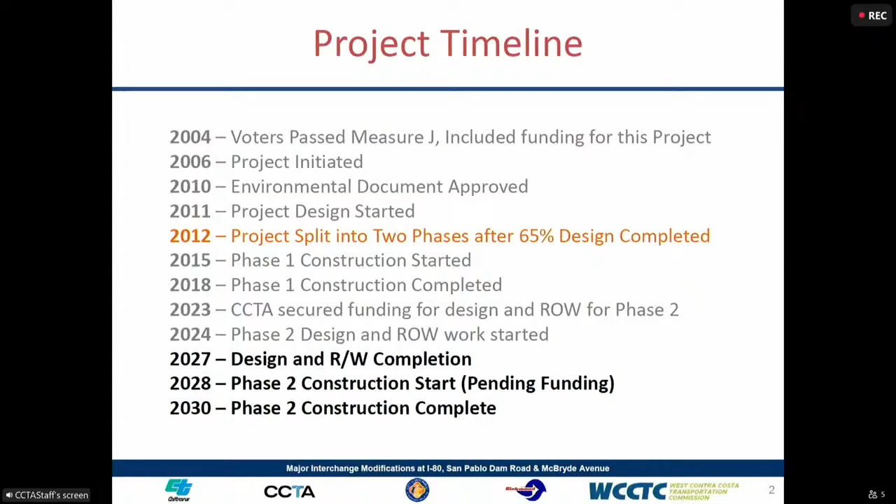So I mentioned we split the project into 2 phases. This might be too small to see, but the green portion is what we completed in 2018. We managed to address the issue of how close it is to the El Portal Drive on-ramp, so we closed that on-ramp and moved it north to make room for weaving on the freeway.

Also, we replaced the pedestrian bridge that leads to Riverside Elementary School, which was a big deal. When we replaced it, we extended it across Amador Street, so kids don't have to cross a busy street once they cross the freeway. It'll take them directly to the school property. That was a big safety improvement done as part of Phase 1.

Everything else needs to be done as part of Phase 2. Phase 1 cost us about $42 million. Phase 2, which will replace the interchange, is a much more expensive project, and we'll go over the costs later.

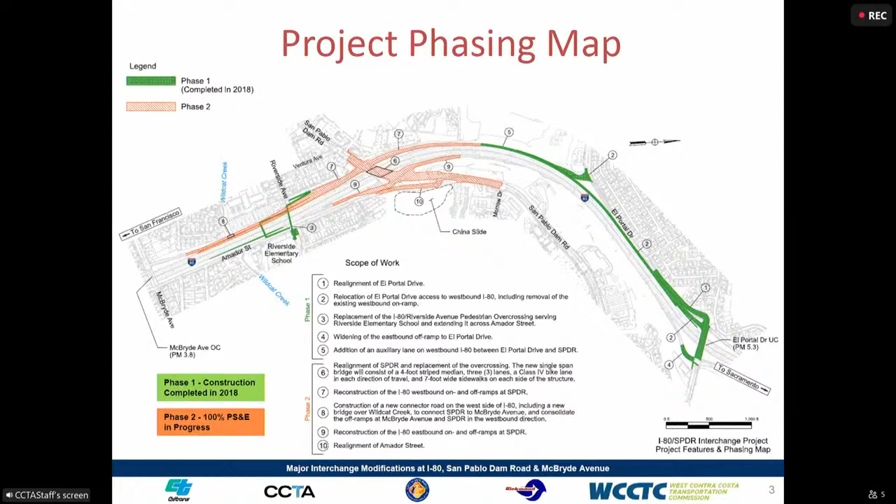In terms of the needs of the project, I feel like I'm preaching to the choir here. The congestion is one issue—you can see the ambulance stuck in traffic on San Pablo Dam Road. That's not an ideal situation.

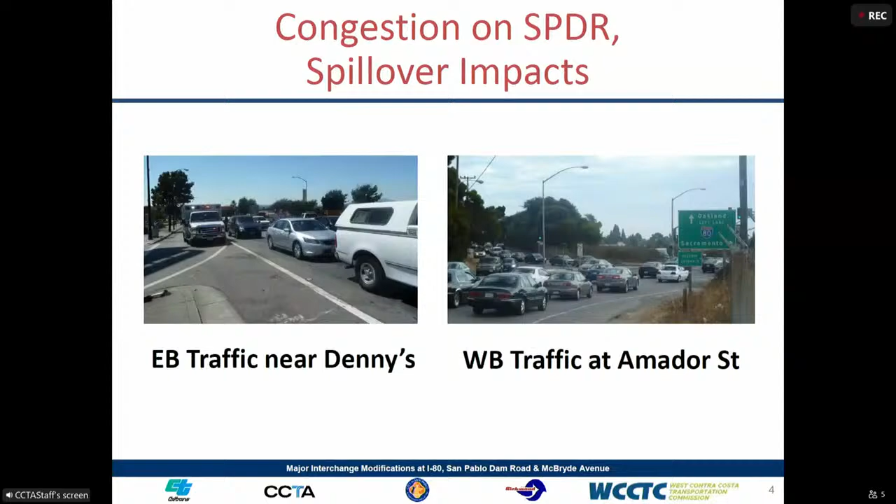But more importantly, it's really the safety concerns with the project. The project does not meet current standards. The vertical clearance does not meet current standards, which leads to a lot of hits or strikes by trucks. This bridge has been hit so many times. Every time it gets hit, the freeway shuts down for long hours to clear it, and there have been fatalities because of that.

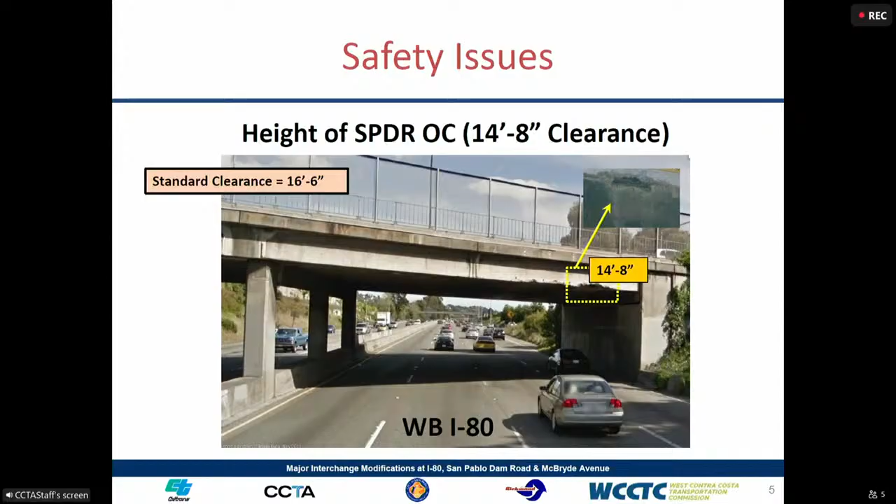That's one issue. The other issue is, you can see here on the freeway itself, the bridge abutment is right on the travel lane. So if you take your eye off the road, you have a good chance of hitting that bridge, and that happened—unfortunately, people passed away because of that, as you will see in some pictures.

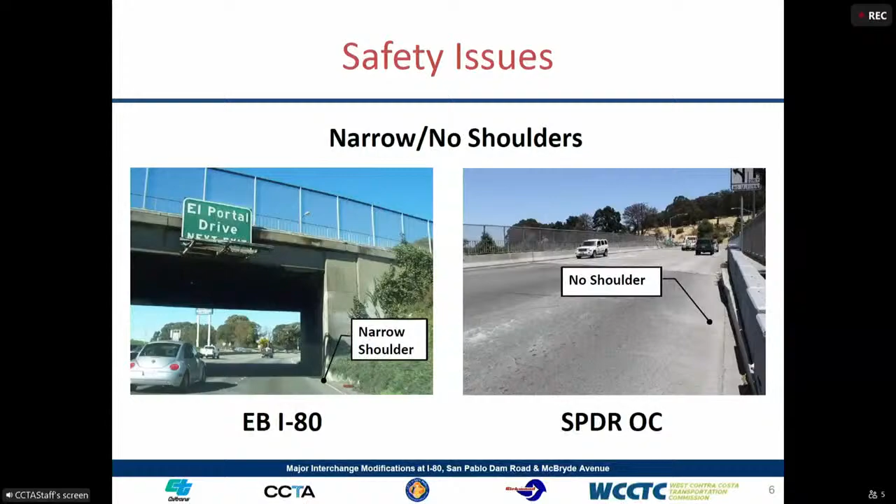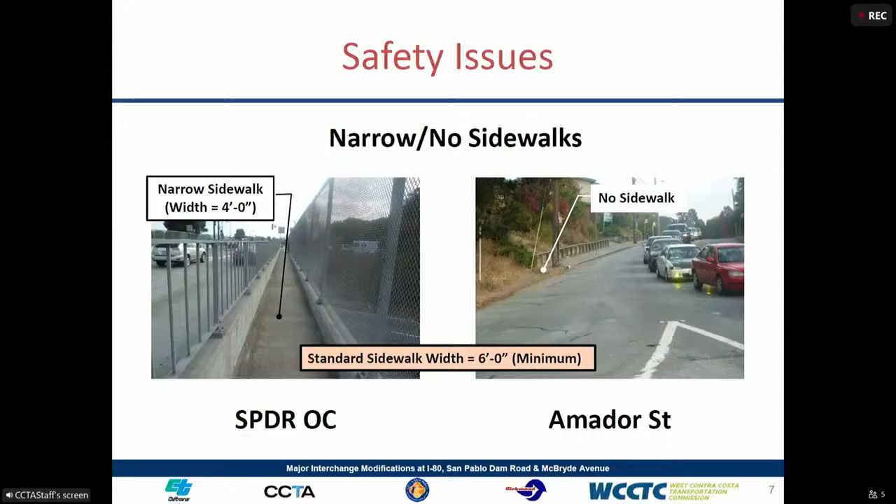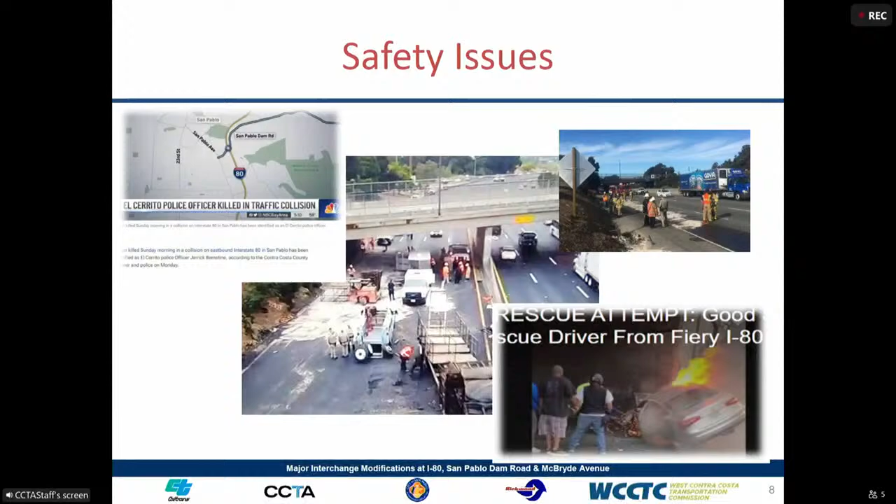On the bridge itself, there is no shoulder for bikers, and sidewalks are missing in multiple areas in the project area, and when they exist, they're narrow and don't meet current standards. These are some pictures from real accidents that happened where people lost their lives. Unfortunately, as we work on the project, it's still a major problem on the freeway, and more accidents are happening.

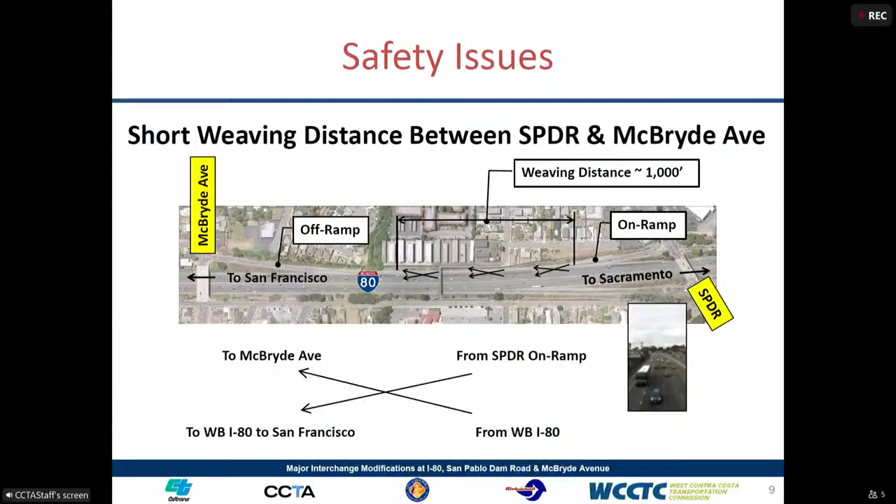I mentioned how close the San Pablo Dam Road Bridge is to nearby interchanges. This is the McBryde off-ramp—it's really close to the on-ramp from San Pablo Dam Road. With the heavy volumes, the freeway basically breaks down as people try to get on or exit the freeway. So to solve this problem, we are proposing to close the off-ramp and provide a more direct way to reach McBryde Avenue from San Pablo Dam Road, as you will see in the next few slides.

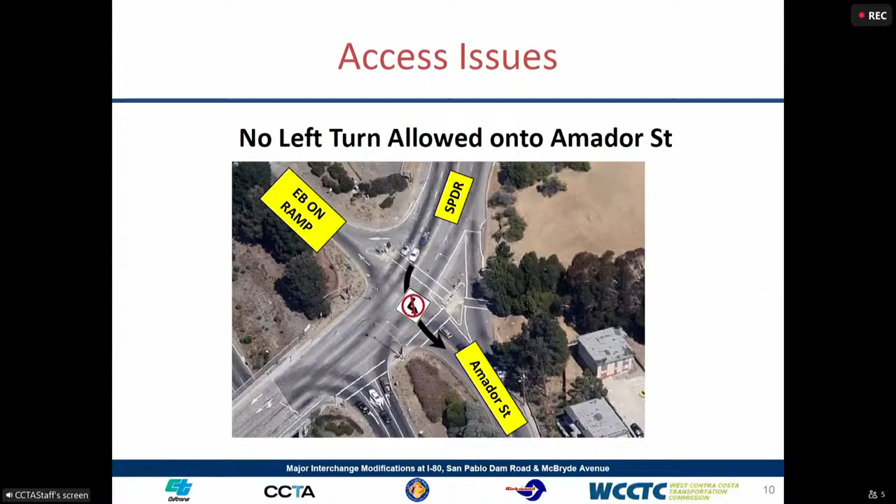Also, the configuration at the interchange is not ideal. You have offset intersections, and some movements are not allowed, but people still do it, like the left turn from San Pablo Dam Road to Amador Street.

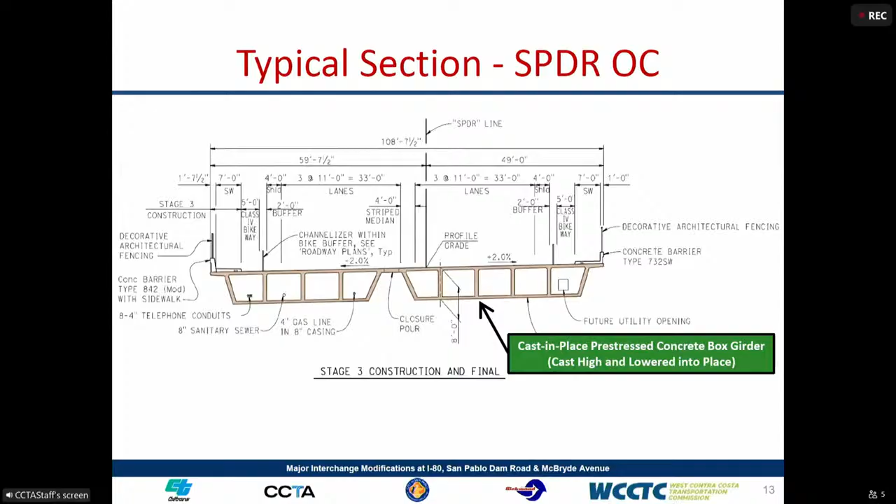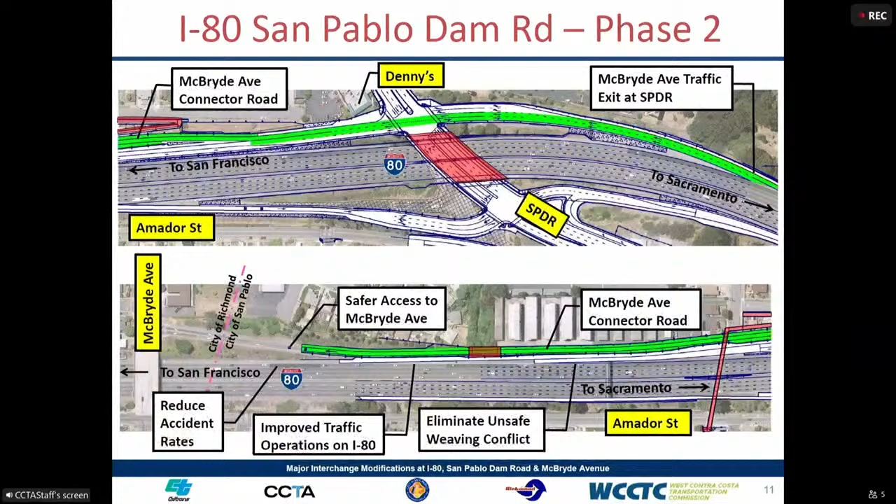We also have another, much smaller bridge that we need to construct over Wildcat Creek. Let me show that—you can see it in the brown highlight on the bottom picture. That's to accommodate the new access road we will build as part of this project.

In terms of utilities, we are impacting multiple utilities as part of the project. They are listed on the slides. You've heard our discussion about East Bay MUD—we reached a settlement, and they agreed to pay for all relocation costs related to Phase 2, which is great.

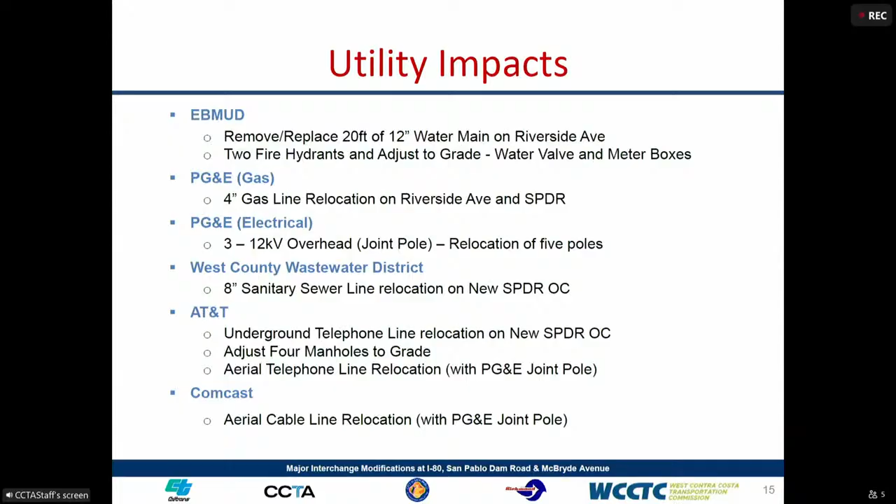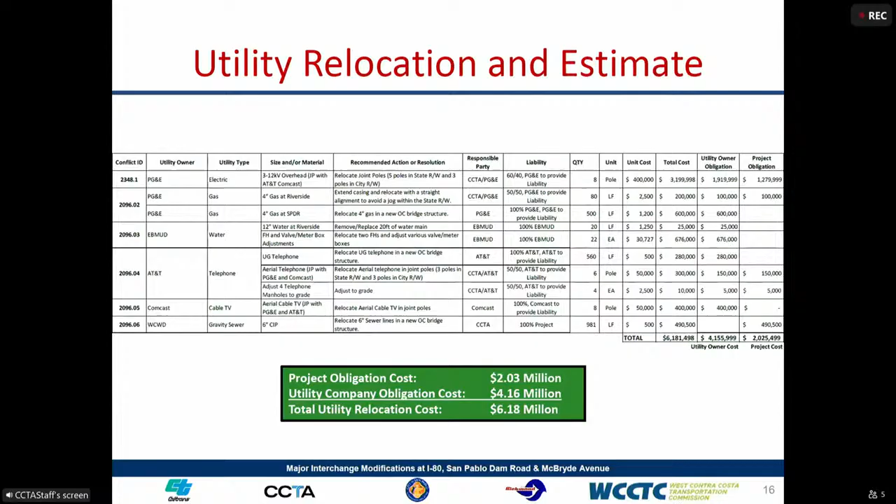The utilities are currently designing their own relocation plans. We anticipate the total cost would be about $6 million, but $4 million will have to be paid by the utilities based on the agreements they have with Caltrans and the city. So our obligation is about $2 million. These costs are still preliminary—we will know the final cost once the design plans by the utilities are completed.

We are asking for amendment because as we started work on Phase 2, we realized there are certain things we didn't think about 2 years ago that needed to happen. One of them is related to new requirements, new studies that we didn't do before, related to cultural resources and consultation with Native Americans. These are extensive studies that now we have to do.

Also, we had hoped some of the studies we've done earlier would just be accepted by Caltrans, but unfortunately, we had to do updates to these studies, like the noise study, the visual impact assessment, and so on.

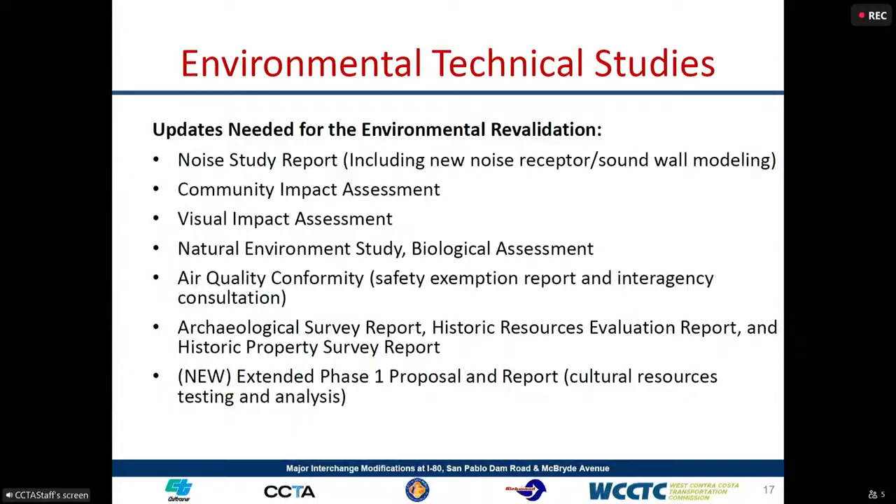It's not all bad news though. Some of the studies we ended up doing, like the noise study and noise modeling, ended up saving us over $1 million in construction costs because based on the number of receptors we added in the different areas, we found out that we actually don't have to replace sound walls or make them taller. So it did save us money down the road.

In terms of the right-of-way, we had planned for the county to do all of the right-of-way work, but unfortunately, because of limited resources, they are doing just an oversight of the process. They're still involved, but all the technical work actually ended up being done by ARWS, which is a subconsultant under the AECOM work. That was significant work, about $400,000. So in order to keep the right-of-way schedule on track, we basically moved money from future design phases to keep that work going. That's part of why we need this amendment.

As part of the project, we actually did a lot more value engineering given the cost of the project. Initially we thought we're going to have 2 full takes on this project. We managed to avoid that with partial takes and reduce the impacts on some of the properties. So in total, the right-of-way picture doesn't actually look very bad — I think we will end up with savings on the right-of-way. We have about 7 parcels where we need temporary construction easements, and 6 of them will have some partial take.

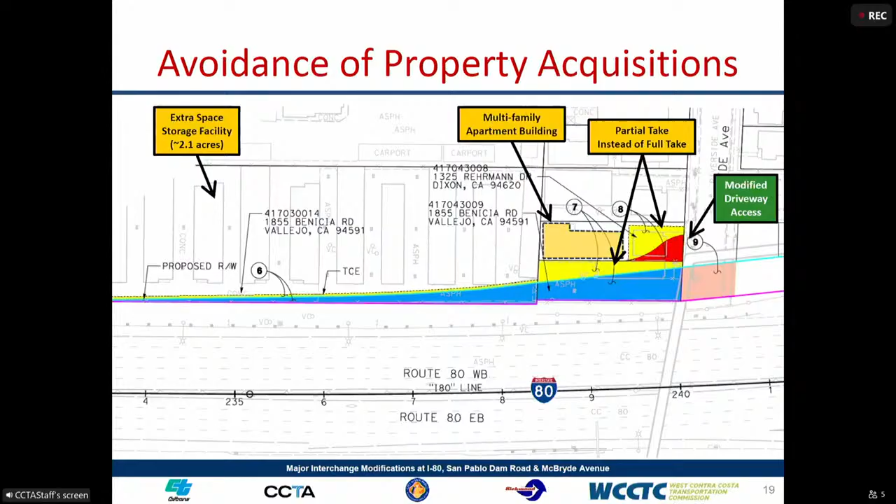These are some of the areas, just to highlight, where we've been able, through value engineering, to save cost. As you can see, the Extra Space storage facility, we had assumed that's going to be a full take. However, through value engineering, we were able to save that property. We will impact maybe a building or 2, but the rest of the property will remain in business. Also, there was a multifamily apartment building that we avoided impacting as part of the project, which saved us a lot of costs too.

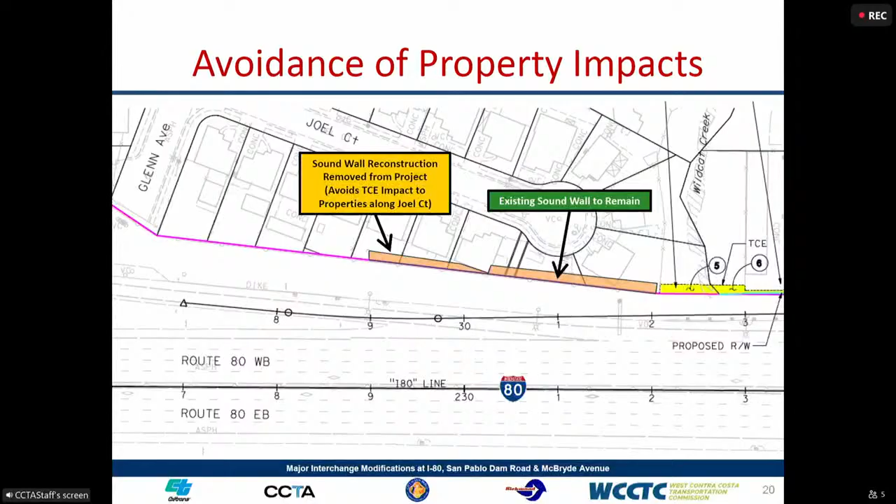In terms of the sound wall and the noise analysis, this is the sound wall that we were supposed to increase in height to address the noise. With the additional modeling, we found out the existing sound walls will do just fine in reducing the noise. So we avoided impact to 6 properties because of that, which saved us $1 million.

In terms of the engineering itself, the profile of the San Pablo Dam Road was reduced. Working with Caltrans, that added a lot of savings to the project because your retaining walls don't have to be as high, and it also impacts drainage and other stuff.

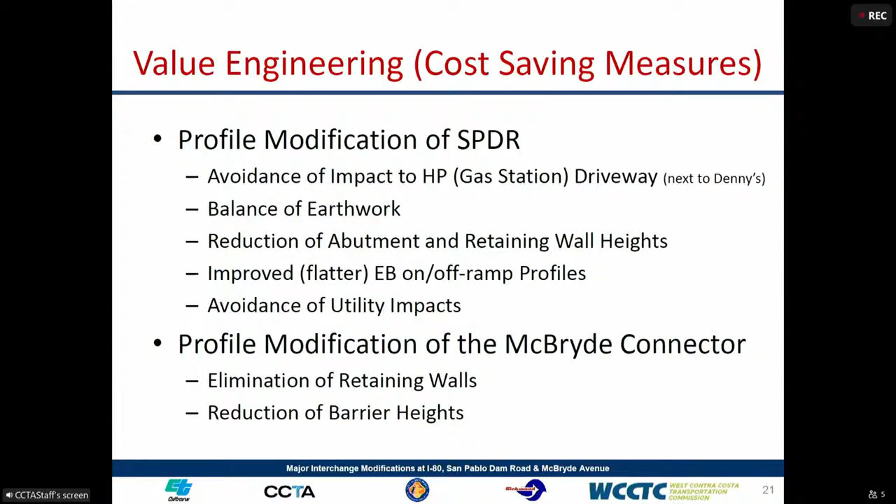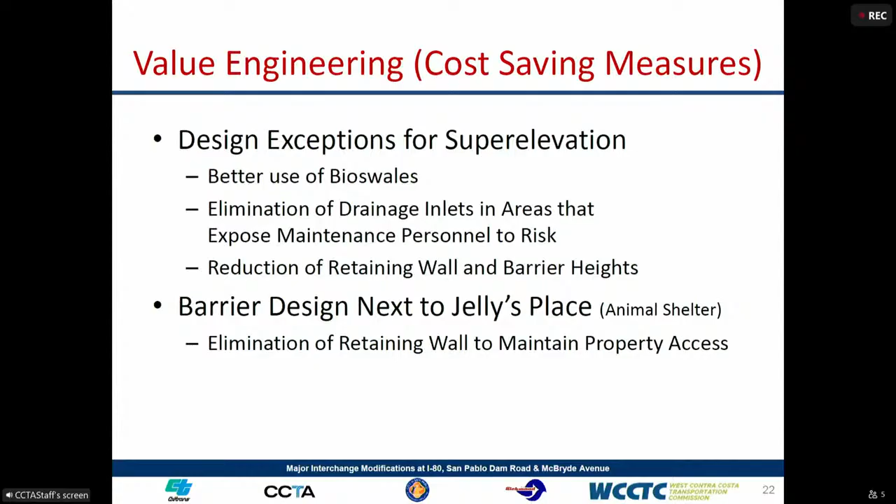There are also areas where we were able to seek design exceptions from Caltrans that helped us save costs. I don't know if you heard in the news about Jelly's Place, in San Pablo, where they were worried that they would lose their property. The project basically managed to avoid impact to that property so they can still stay in business. So that's some of the work we've been doing to try to manage the costs on the project.

Despite that, the project is expensive. Right now we have full funding to do the design and the right-of-way, but construction is unfunded. It's going to cost us, based on the latest estimate, $134 million to go through the construction phase — construction capital plus construction management. We are in the process of applying; we started 3 months ago working with Caltrans on the forms. We are going to apply for $70 million in SB1 funding from the Trade Corridor Enhancement Program.

Also, we would have applied for more, but they told us that's the maximum we should apply for to improve our chances. In terms of the local partnership program, we're applying to the maximum allowed of $25 million. That's $95 million. But this funding needs a match, and that's where we have a problem because we're running out of Measure J. We don't have much Measure J left. That's where Measure J or a new measure would help us, is provide the match, having $40 million in matching funds.

So what we will be proposing to you, and this is not part of the action today, we will come back probably in June, July of next year before we submit the application and ask you if you would be willing to commit our future STIP money as a match for this project, which will be about $35 million. If you agree, which takes basically having the entire county behind this project to get it funded, then West County will sit out future cycles of the STIP so other projects in other subregions can move forward. We just need to take turns without funding from a new measure to fund these types of large projects.

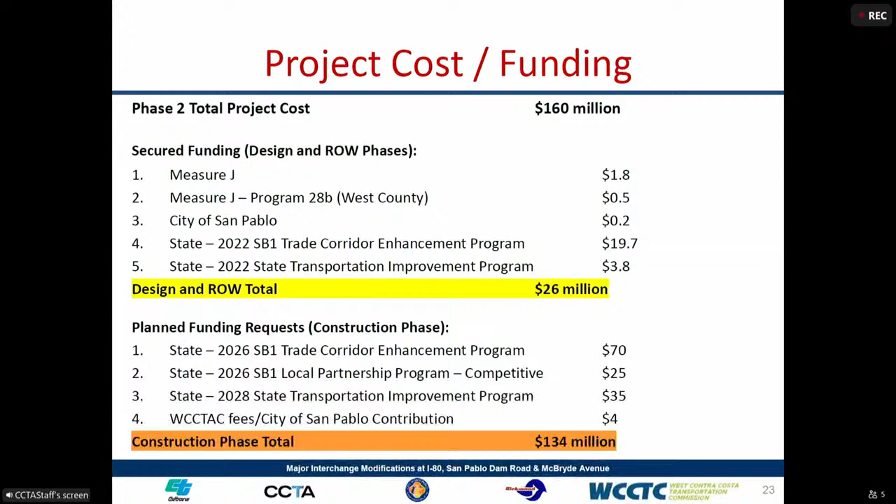So, and this is a project where Caltrans is behind us on. The one on 680, we didn't get their concurrence or support for that project, yet we got the funding. So I'm hoping this will have even better chance. Of course, there are no guarantees. If we don't get funded in the next cycle, we'll just have to reapply the cycle after that, and hopefully by that time we'll have a new measure where we can use that as a match.

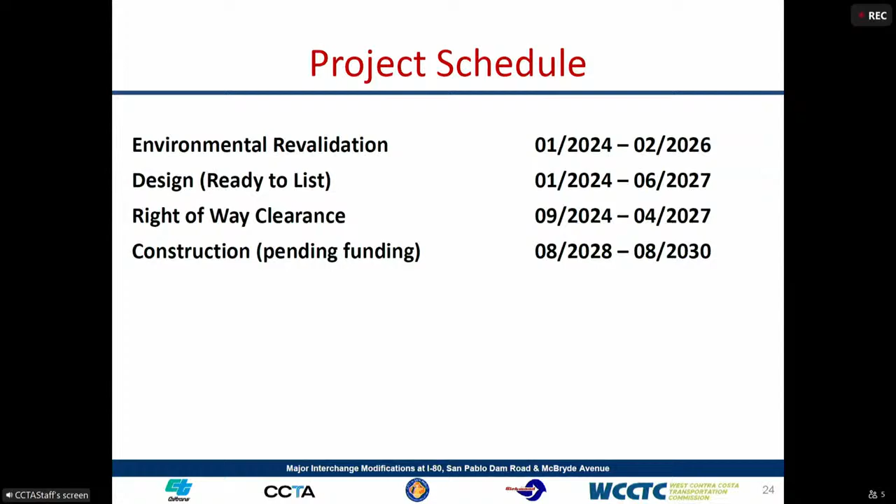In terms of the schedule, as I mentioned, we will be done with the design and the right-of-way by June of 2027, and pending whether we're successful with the construction funding, we'll start construction in 2028. It'll take us 2 years to complete the project. So with that, I'll be happy to answer any questions.

What's the timing delay if we have to delay because we don't get some of those, and then we have to reevaluate there or redo the environmental and everything? When does that usually sort of run out?

Yeah, thank you. So the announcement for the TCEP funding and the LPP funds will be done in June 2027. And that's when we'll be done with the design and right-of-way. So our project will be shovel-ready. That's the whole idea, is to be shovel-ready to compete well. If we, God forbid, if we don't get the funding, now we're delayed 2 years, and every year you get delayed, it's another, just the escalation cost, $3 to $4 million in additional cost that gets added to the project, just in escalation. And you will need to revalidate the document.

The revalidation is required 6 months before you go into construction. If the documents are older than 6 months, then you have to do revalidation. Now the effort will be much less because we've just done it, so hopefully it'll be a quick revalidation. But the other issue is the design plans. Every year now, Caltrans adopts new design standards. And by October 21st, if we're not advertised, we need to reassess our plans according to the new design standards. So there will be some cost there.

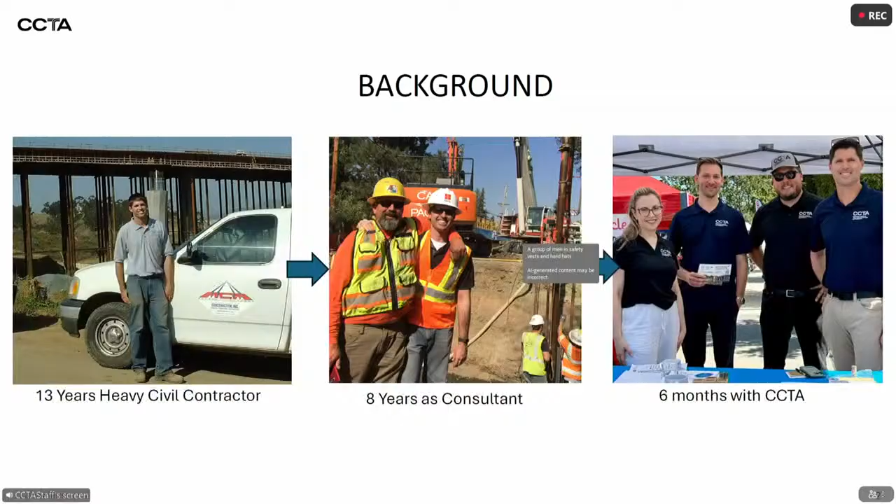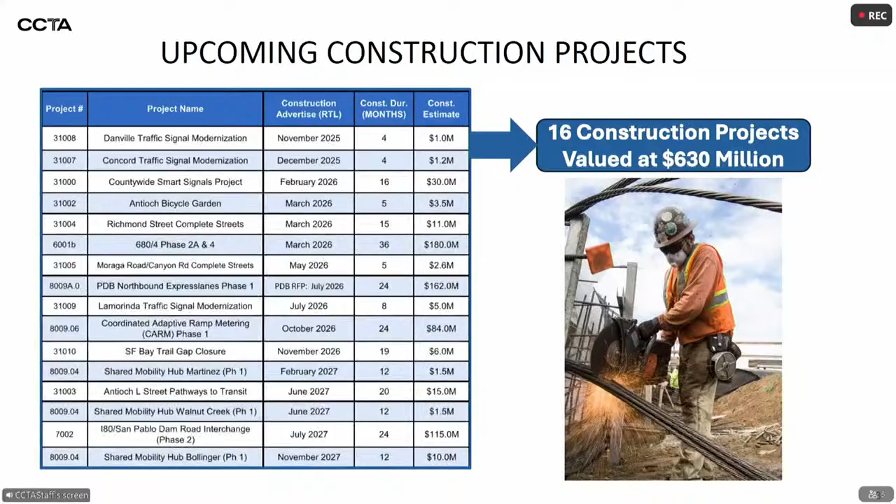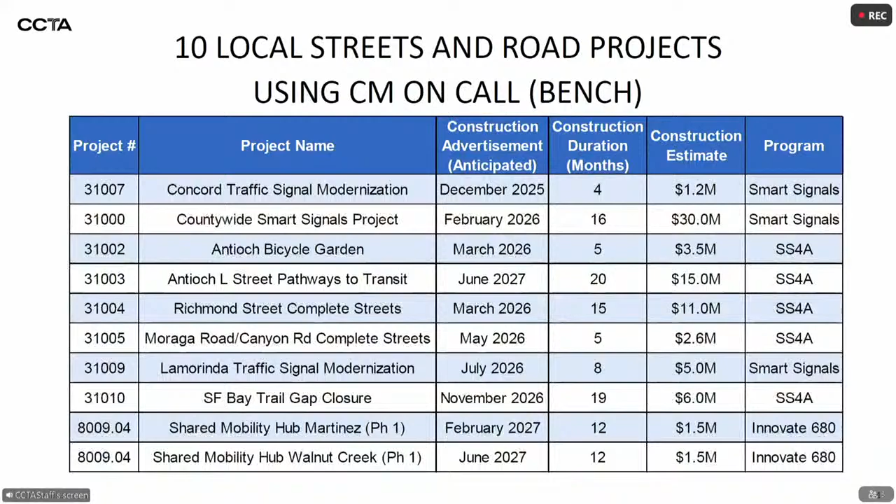This is a list. From that list, I pulled out 10 local street and road projects. We will actually be using our on-call CM, construction management, to run these projects. So item B on the consent item today was to release RFPs for that on-call. These are different projects ranging from $1.2 million all the way up to $30 million, all across the county. So having that on-call bench, we're going to have 5 qualified firms that we can do mini RFPs for as these projects come up and find out the most qualified team with the best resources at that time, and then I will bring the task orders to the board for approval before signing and agreeing to those. But these are largely the 5 Safe Street for All projects, the smart signals, and the mobility hubs.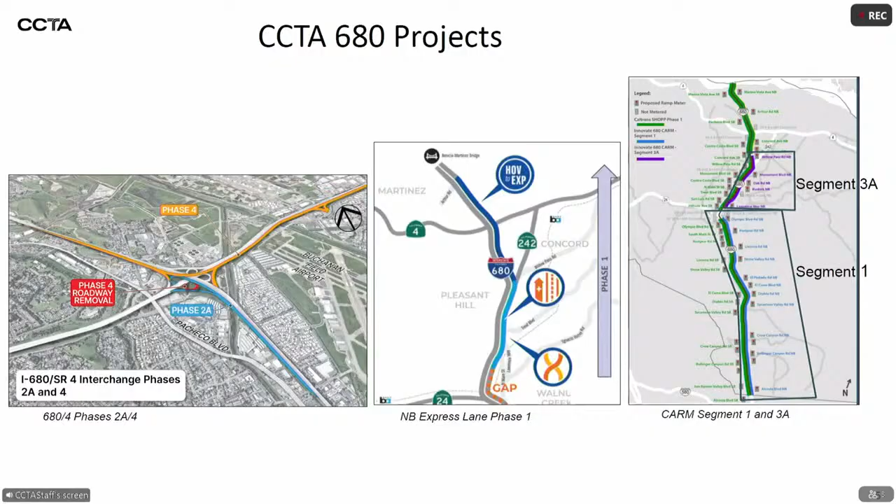We also want to highlight 3 of our larger projects along the 680 corridor. On the left, there's the 680/4 Phase 2A and 4 that I recently presented on. The middle picture is the northbound express lane Phase 1, which I'll be doing a presentation on after this. And on the right is CARM, Coordinated Adaptive Ramp Metering, Segment 1 and 3A. I also want to point out that item G on the consent calendar was to do an amendment to WSP for the design, and that's for segment 3A. With the mega grant we got last year, we were able to extend the scope from segment 1 to 3A, so that amendment for WSP is the additional design for that scope.

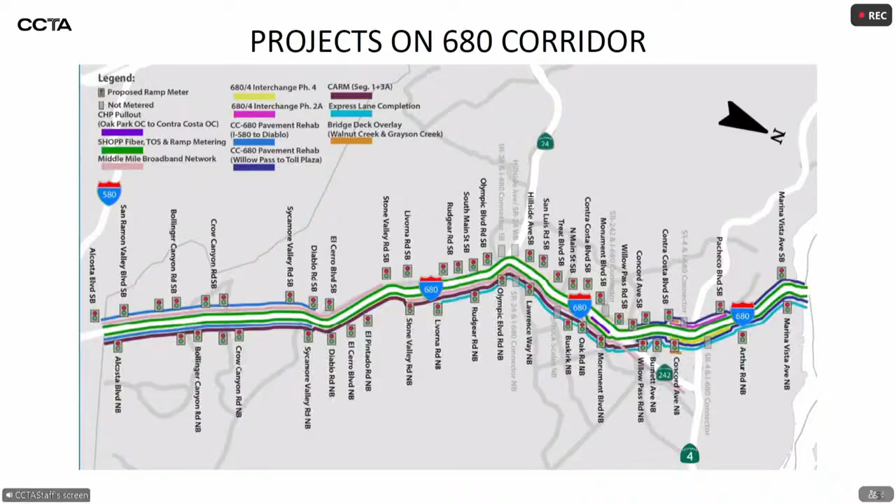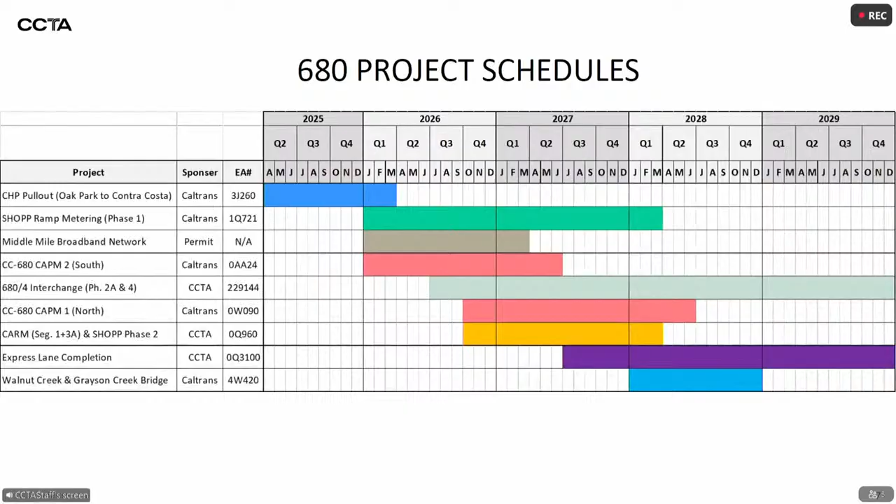But unfortunately, we are not the only projects on the 680 corridor. This is a very busy graphic, I recognize, but this is showing all the different projects happening around the same time that we're coordinating with. The projects are on the top left with colors, and it shows the limits on the bottom. Stephanie Hugh and I have been working bi-weekly meetings with the different leaders from all these different projects. So we have Caltrans SHOPP, ramp metering projects, pavement, broadband middle mile, and we also have our three projects. We're working on a bi-weekly basis, and this is a really big priority for us to coordinate the construction work so there's no rework, the lane closures, and really minimize the impact to the public. This is a major priority for us that we're working on to have the best results.

Another thing we're working on is updating our front-end specifications, contract forms, and pre-qualification. These will be on every design bid build contract, and it's really clarifying the dispute resolution, claims, scheduling requirements, extra work, so everybody's crystal clear on those requirements, notifications, how the process works, and this is to reduce the amount of disputes on the project. We'll also be having a robust contractor pre-qualification program for design bid build, which is relatively rare, and I think that's going to be extremely helpful with our contractors in the future.

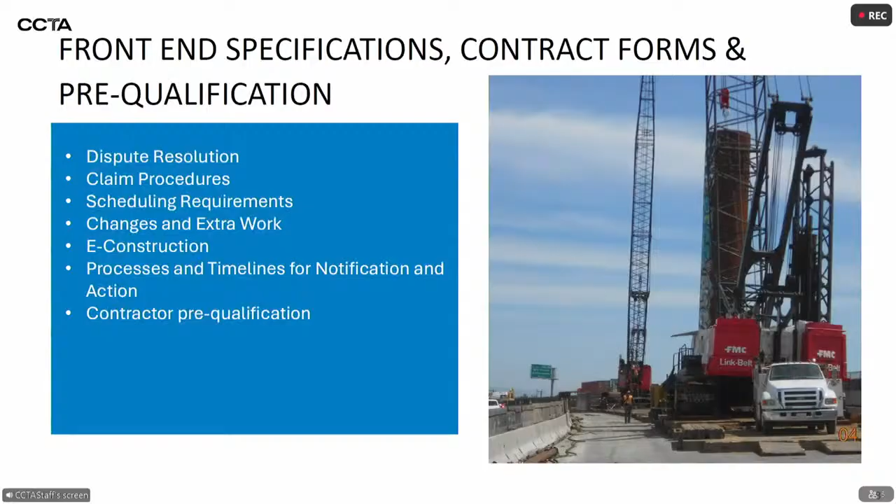It was last updated in 2015, so it does need some modernizing. A lot's changed since then. We're also aligning it with our front-end specs and contract forms, and we're going through the whole thing, making sure that the flow charts, the checklists, the roles and responsibilities are all crystal clear. But this is the manual, the document that we use to have our standard process and procedures for AAAing the project: award, advertise, administer. This is what we follow, and we're really excited to have a new document. This should be done early 2026.

We also follow the CCTA Quality Assurance Program. This provides a consistent level of quality for all parts of project delivery - environmental, design, construction. It provides a clear and robust way of staying on top of quality, having consultants provide quality management plans and processes for value analysis and engineering. Specifically for me, this gives a much higher quality for design, especially detailed surface and subsurface investigations, which are often a problem for construction. I really appreciate this manual and how we enforce it, because in construction, having a better set of design is extremely helpful.

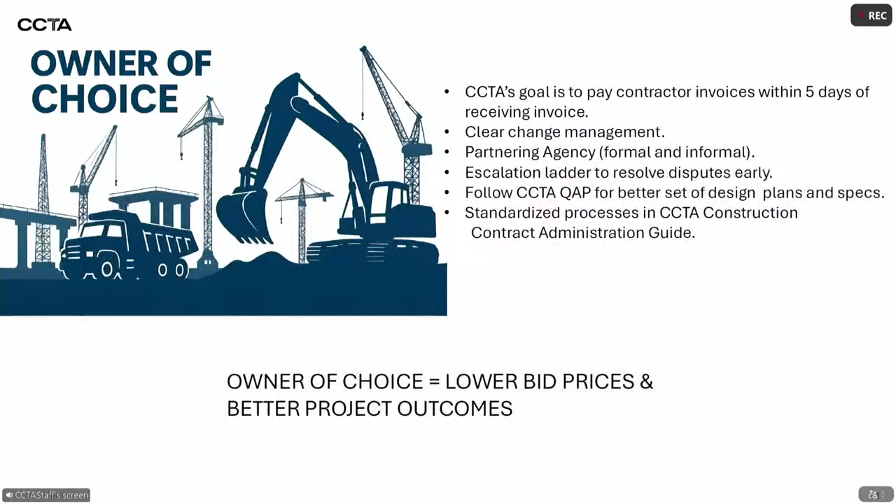CCTA is one of the most innovative construction programs in the country. This is a major passion of mine, so I'm excited to continue to push it forward.

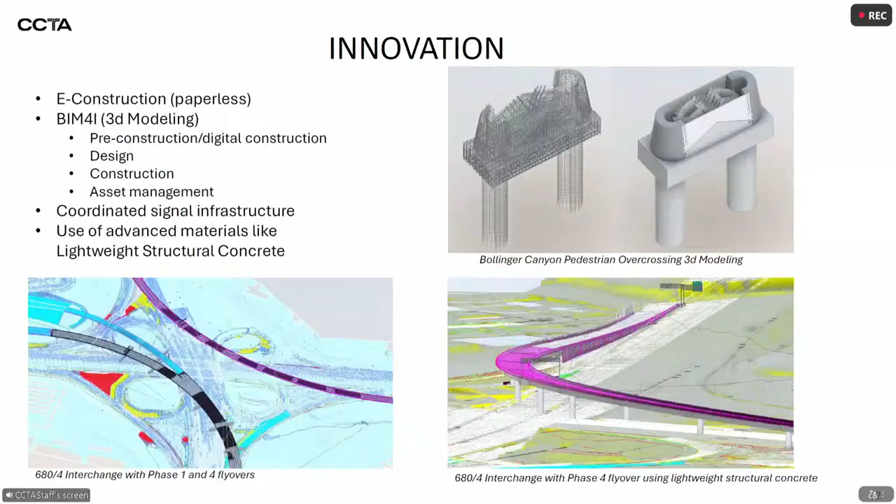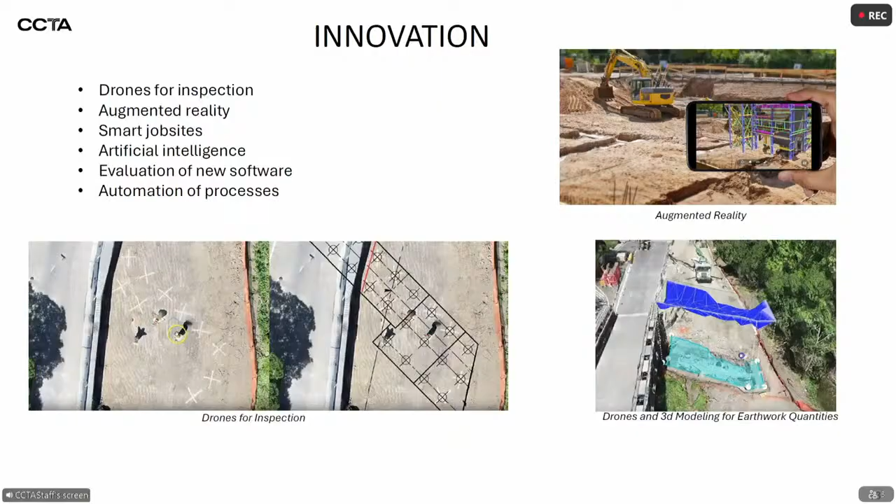I'll be giving a presentation on this following one. But both of these delivery methods allow us to pick select contractors based on qualifications and have a much higher level of collaboration and much more successful projects.

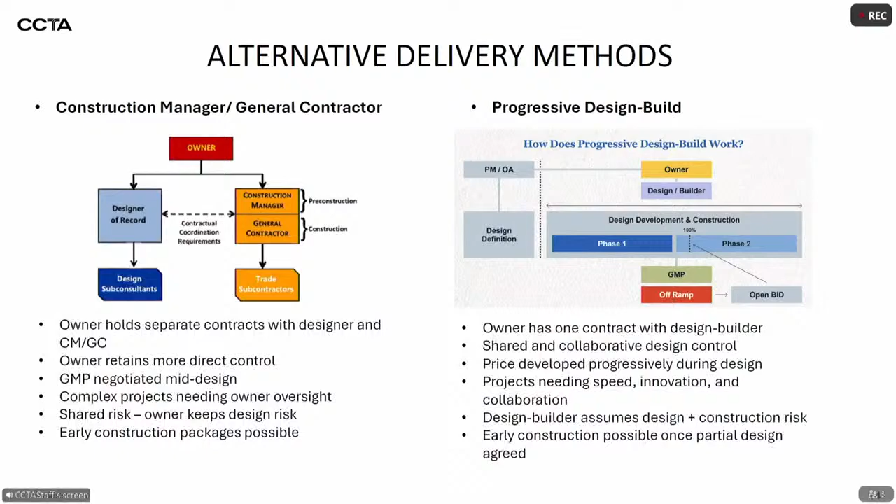To highlight the CMGC model at Bollinger Canyon—this is the only project I've been to the ribbon cutting for, and it's the only project I've heard of where everybody was happy at that ribbon cutting. The designers, the contractor, the construction management, the owner, the stakeholders, the public—everybody was happy. A large part of that was because of that delivery method, CMGC.

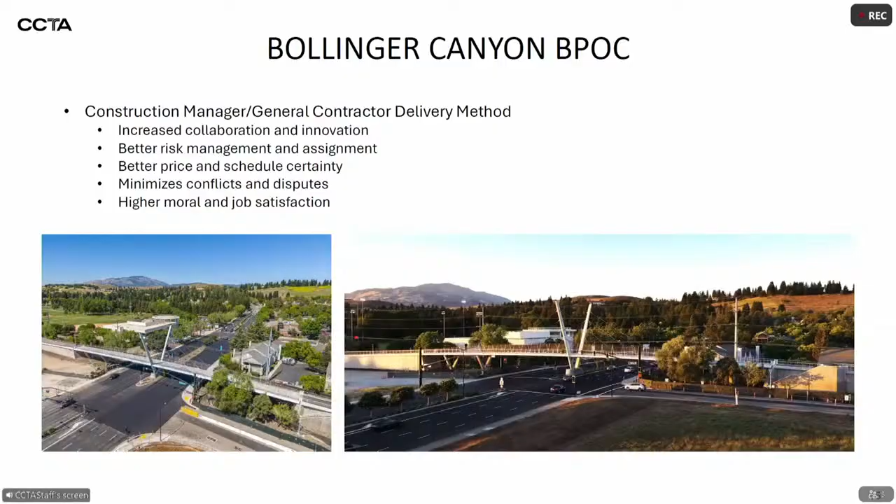So it increased collaboration, innovation, better risk management, better price and schedule certainty, minimized conflicts and disputes on the jobs, and had higher morale and job satisfaction. Just overall, a much more successful project.

So with all of that, the future is bright for the CCTA construction program. We have multiple delivery methods we can use depending on the project, whether it's design bid build, progressive design build, or CMGC. We're going to emphasize collaborative project teams, continue innovation, high-quality projects, partnering. A very important thing to me is maintaining positive public perception, and ultimately we'll have efficient, lean construction so we can do more projects with the same amount of money.

And I don't have a slide that says questions—I thought I did. Oops. So, any questions? That's right, any questions, Darlene?

Yeah, so thank you for the presentation and all the great work that's being done. I love the engineer-contractor humor, like four people got it in the room under construction—that was great. And I also love the term design clashes as opposed to conflicts, because really they are clashes, right? Even more than conflicts. Yeah, I like that, I'm going to start using that myself.

But I guess one of the questions I asked you when we were talking offline was whether all this new technology and ways of avoiding clashes, changes, and delays and longer schedules will save money on the front end, as far as the design and the CM contracts, because we know those are big, right? They end up being a lot of money. And as I recall, your answer was not necessarily. Could you maybe just expand on that?

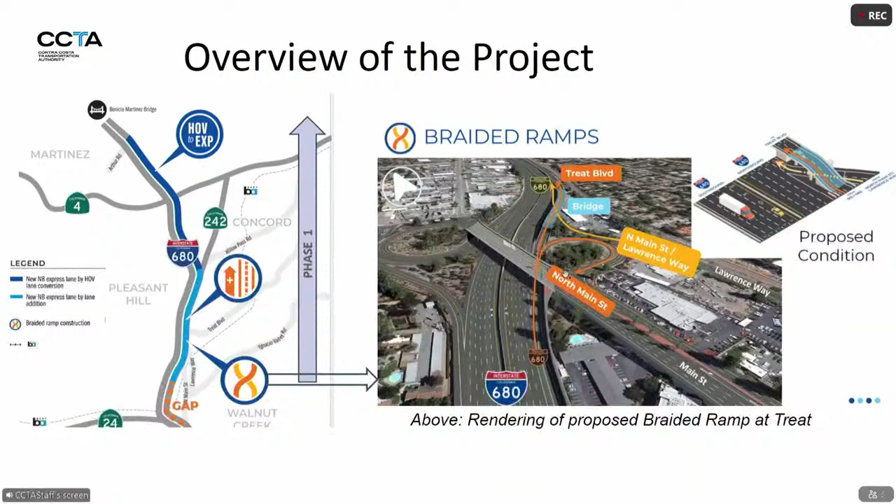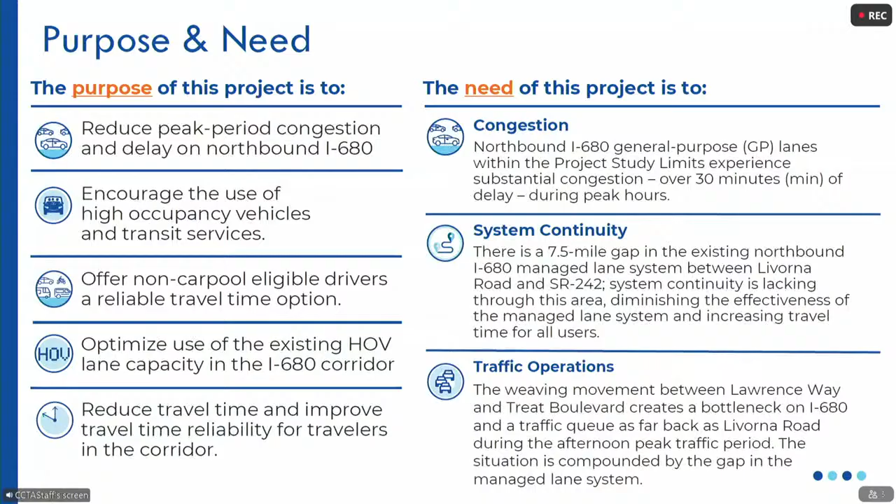As far as the purpose and needs for this project, the main purpose is to reduce congestion and improve travel time reliability. On the bottom right, that braided ramp at Lawrence and Treat is going to be a huge benefit because that area creates a bottleneck and congestion back on the 680 that can go all the way back to the 24. So a lot of improvements with this project.

Project updates: Stephanie Hugh gave a presentation at the April 2025 board meeting, giving a really good overview of the project. Since then, the project designer HDR has continued with preliminary design and expects to be done with 30% design by June 2026. They are very close to finishing environmental documents. We're actually hoping that the PA&ED phase is closed within a couple weeks, and I will include those environmental documents with this RFP. The mega grant is pending agreement execution, and it's looking good, hopefully happening in the near future.

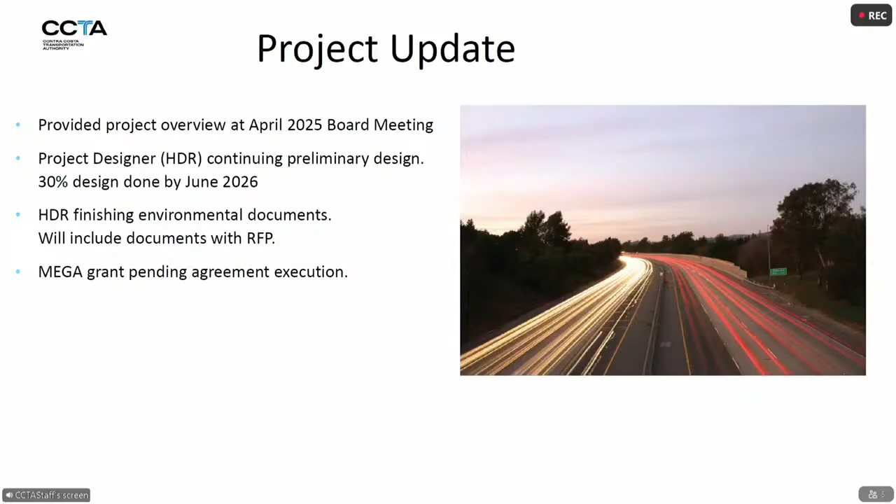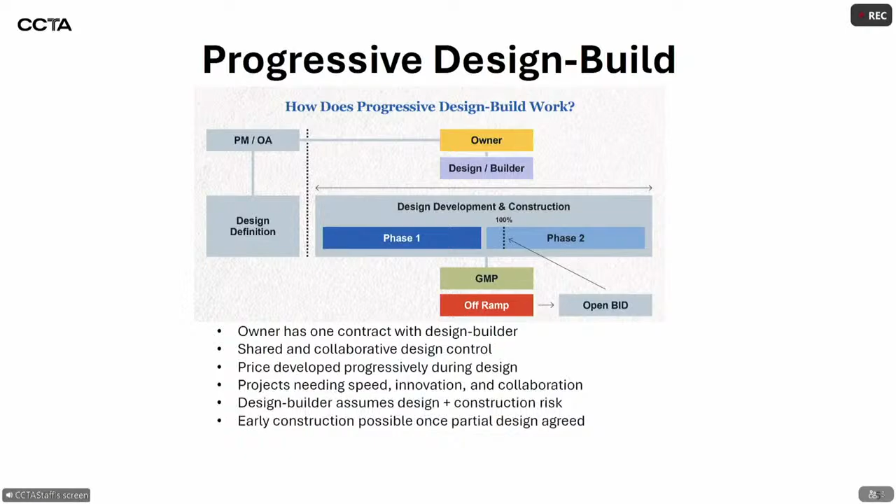This project will be using progressive design build as the delivery method. This is a relatively new delivery model in this area, the Bay Area, though it's used quite a bit around the country. What this means is we go out and select a design builder based on qualifications, bring them on our team, and they take over the preliminary design plans that HDR is working on now. They're able to work essentially on a time and material basis with our input collaboratively as we go through. Once we are on the same page as far as risk and scope, we work together to negotiate a guaranteed maximum price, and from there we have that cost certainty and they can finish the design and go into construction. So it's really like a combination of CMGC with the best parts of a traditional design build.

This graphic here shows the positives and negatives of each delivery method. On the far left, DBB, that full circle is a good thing, that's what we're looking for in each of those characteristics. With design, bid, build, you see a lot of empty circles, so we know there's a lot of challenges there. Traditional design build has a lot of its own issues, and we've seen that around the state as well. CMGC is certainly preferred by us, we like CMGC, but unfortunately we don't have the legislation to do CMGC on state highway systems.

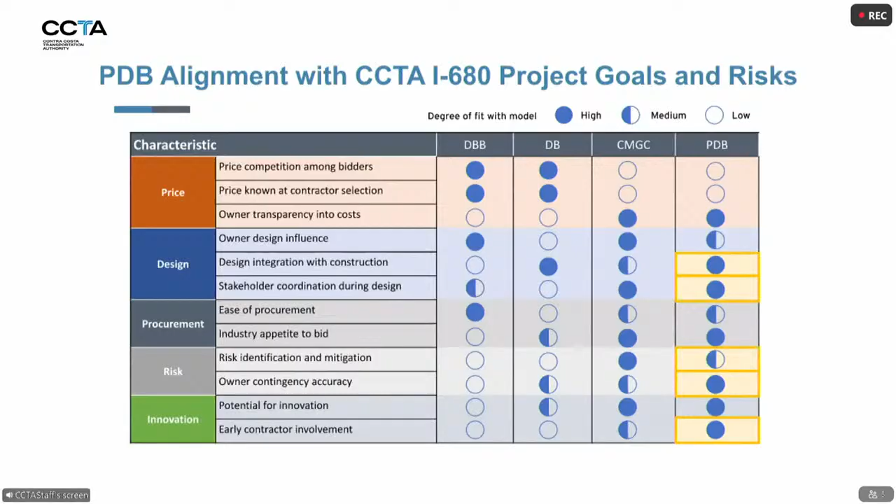So we don't have the opportunity to do CMGC on this project. Progressive design build is on the right there, and the empty circles at the top show its disadvantages, which is there's no price competition amongst bidders because we select the contractor off qualifications, and the price is not known when we select the contractor. Those are the big disadvantages, and I've highlighted in yellow some of the advantages that are most aligned with CCTA's goals, and I'll go over more of those here.

So these are the reasons to use PDB. Number one, we get transparency into the contractor's costs. As we go through the process—30% design, 60% design, all the way to GMP—we get to see how the contractors come up with their costs, understand their assumptions and intent, and be on the same page. Number two, we maintain a level of design influence. With traditional design build, you lose that as an owner. With progressive design build, we're able to maintain influence as the design progresses, and we're able to keep stakeholders coordinated along the way. On design build, that becomes an issue and turns into change orders, but with PDB they can come in and help out the design and continue that as well.

The industry appetite is very excited for this delivery method. For risk identification and mitigation, we'll have a risk register at the very beginning. We work with the PDB team on that, identifying the risk, how to mitigate it, and who's responsible—it's a much more robust risk management system. There's also cost certainty, especially with that GMP at the end; once we establish that GMP, you have cost certainty throughout the construction of the project. There's a much larger opportunity for innovation with the PDB team working together collaboratively throughout the design. There's a lot of innovation in the design, but another thing I'm excited about is the innovation during construction, especially on this project, since we talked about all of those projects happening at 680 at the same time.

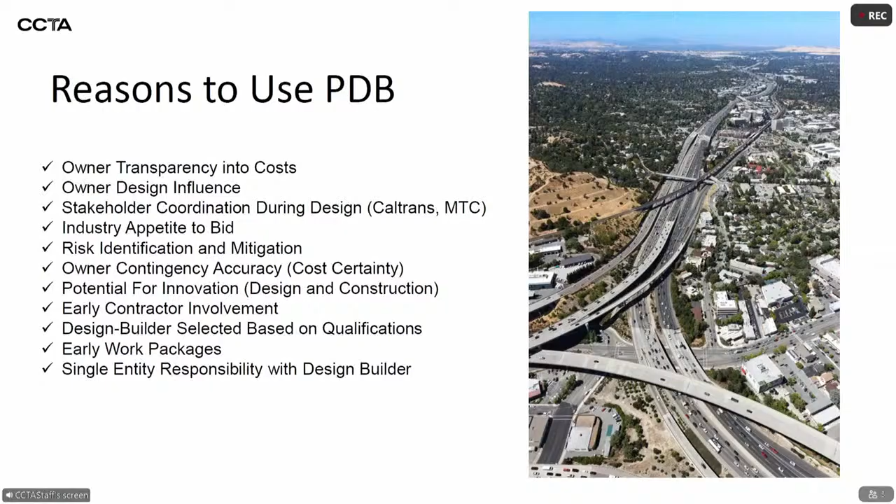And then having one contract with the design builder. On traditional design-bid-build, we have a separate contract with the designer and the contractor, so when there's mistakes, the designer blames the contractor and the contractor blames the designer. Now with one contract, we don't have to play referee, and they're responsible for that entirely. So a lot of benefits of PDB.

Now it is relatively new in the area, so we're aggressively training and learning and getting best practices. Stephanie and I went to a full day PDB training in October 2025, held by the Design Build Institute of America, DBIA. That's an organization we're going to be working very closely with for a long time.

We also plan to be attending the DBIA conference in April 2026, which is a conference for transportation and aviation. We'll also be setting up a workshop in Southern California, meeting with LA Metro, RCTC, and Caltrans, who all have PDB projects, to discuss those best practices and lessons learned.

From that training, I really liked this simple definition, so I want to read it word for word: PDB is where a design builder is selected primarily on the basis of qualifications. After selection, owner and design builder collaborate to progressively advance the design and cost model toward a mutually agreeable design concept and contract price. What this is saying is we pick the team based off qualifications, we work together with them, get on the same page so we all agree on the best design for the project, and we mutually agree on the price, and we move forward.

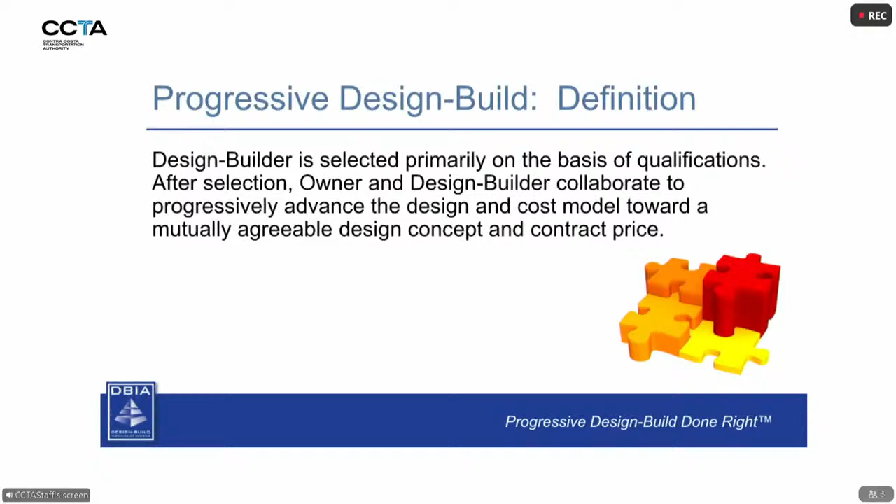So I said that PDB is new in California. Here's some examples of more horizontal projects. It's very common in the vertical world for buildings, but for the horizontal world, RCTC down in Riverside is delivering two projects using PDB, including the I-15 Express Lane, and they've been extremely helpful meeting with us, sharing their information, best practices, and lessons learned. They're a couple years ahead of us. We'll continue to work with them and see how the construction goes, keep feeding off them and learning more.

Caltrans District 12 has an I-5 managed lane project in Orange County. District 11 has a Coronado Bridge Jump Deterrent system. LA Metro has G-line improvements, a BRT line. And VTA has the extension to Silicon Valley Phase 2, and I know there will be some lessons learned from that project.

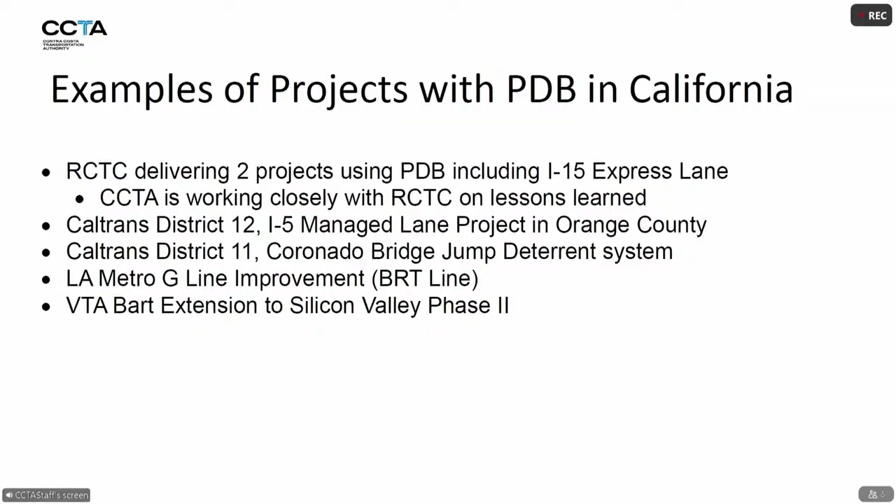This is a list of highway projects using PDB throughout the country. These projects are all in different phases—some have been done and we've heard great success stories, some are just getting started, and some are in the middle. These are DOTs from Florida, Michigan, Utah, and Virginia.

We are going to start reaching out to all of them. We just compiled this list, so we're at the early stages, but my plan is to reach out to all of these DOTs, especially the ones that have gone all the way through the process, and really pick up more of their lessons learned, and keep getting as much information as we can as we go through this process.

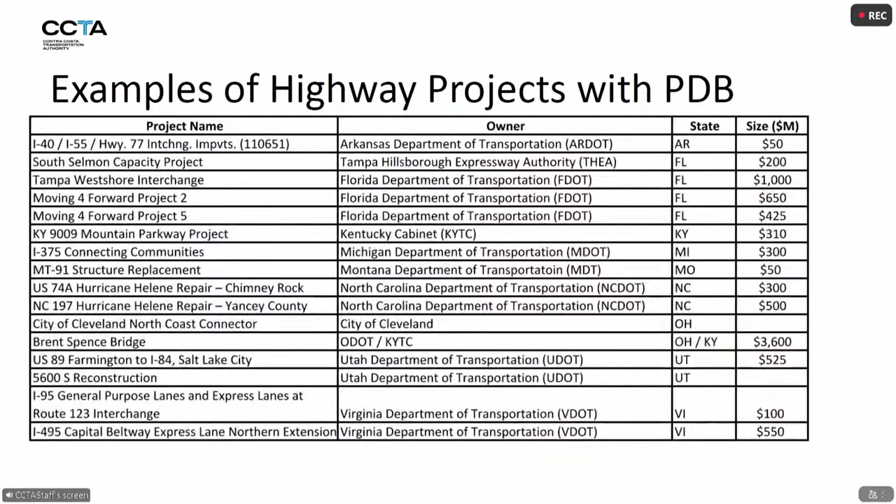So I've been talking about the PDB team a lot, but we need a team to manage that, to be the project managers and construction managers, to represent us and protect the owners. So that's what this RFP is about. It's about getting a really qualified PCM team that has the PDB experience to lead us through this.

As far as the schedule, the PCM RFP will release, pending approval from the board, a couple days after on December 19th. Proposals due January 30th, interviews in March, negotiate scope and fee, and then I expect to be back at the board in May 2026 with a PCM agreement. From there, we'll be working hard to get a PDB RFP and draft contract together, and I expect to be at the board in November 2026 to release that RFP. Construction duration happening from 2027 to 2030. The funding for the PCM will be the Regional Measure 3, RM3, as well as the federal mega grant.